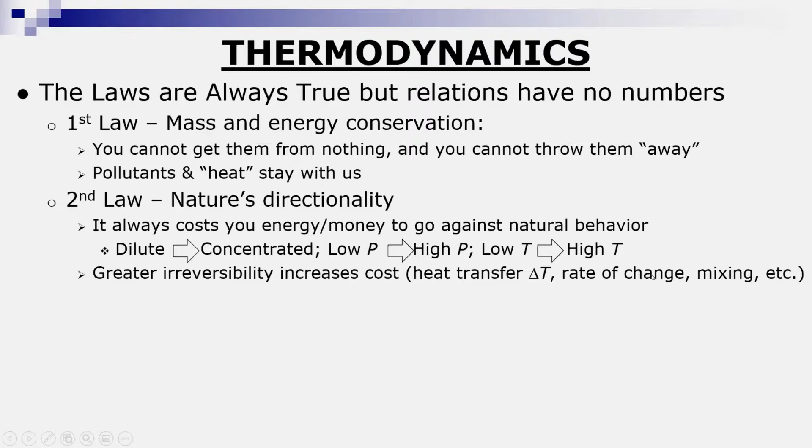So if you want to save money and effort in terms of your processing, you want to reduce the irreversibility, which means you want to reduce these kinds of differences and get toward reversible, in which delta T is zero, the rate of change is zero, mixing doesn't cost you anything, and so forth.

Now, properties give quantitative descriptions of state variables. What I mean by that is, if I specify the state, for example, temperature, pressure, composition, and phase, then I know a value. I can consider a variable to be fixed by that. And when I change the state, the variable is likely to change. And measurables are observable and usually what we specify. For example, temperature, pressure, density, the number of moles of components, and so forth.

Conceptuals are non-measurables. There isn't a meter for the enthalpy or for the entropy or the Gibbs energy or the fugacity coefficient or the activity coefficient. So you have to get those from models, and they're the ones that connect measurables to conceptuals to arrive at values.

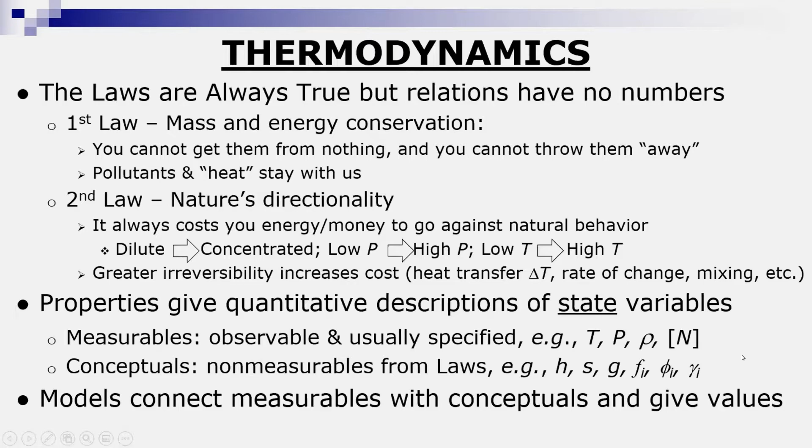Here's a picture that comes from Gani and O'Connell, this was not the first paper we actually published together, which was done in 1999, but a presentation of how to think about process models that process simulators, for example, do. They solve constraint equations and balance equations. Rafiq showed a number of those.

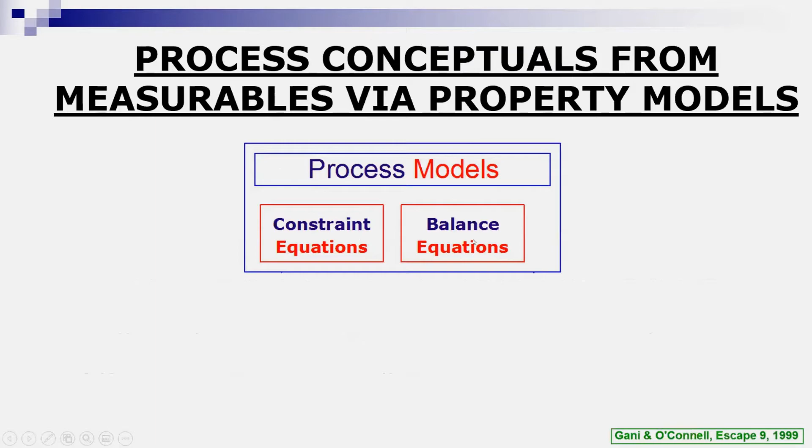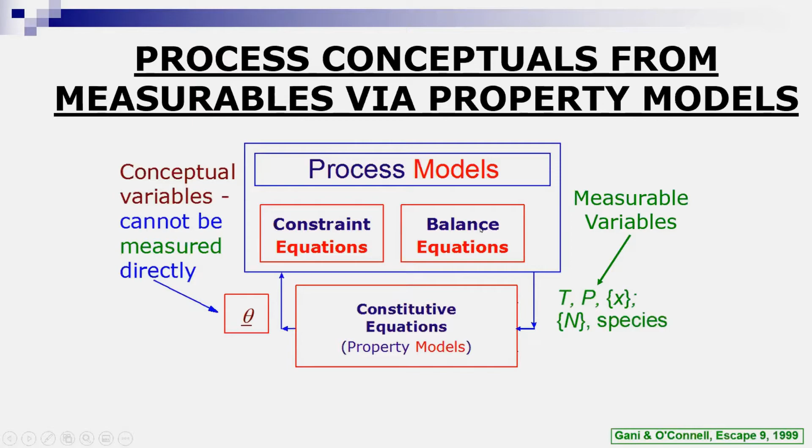You start with measurable variables, temperature, pressure, composition in mole fractions, number of moles, which species are you dealing with. And these go into constitutive equations, which is the name we would call for property models. And the result will be the conceptual variables, which you can't measure directly, but they are the ones that actually appear in the constraint equations and the balance equations. So that's why property models are necessary. And while the balance equations and the thermodynamics are always true, property models are only sometimes true.

So here's some property models. This is a picture of a process that was done by our good friend Ralf Dohrn at Bayer, again, many years ago, in which there are various units, compressor, heat exchanger, reactor, distillation column, and so forth. And he lists the properties that would be used to evaluate and determine what the unit will do, how big it will have to be, and so forth.

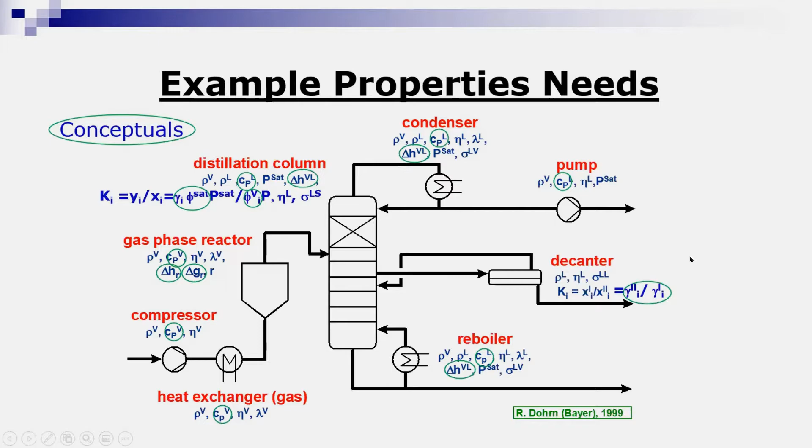And among those, there are a number of conceptuals, like the enthalpy of vaporization, the saturation fugacity coefficient, the vapor phase fugacity coefficient, Gibbs energy of reaction, heat capacities, and K factors, which would be in a decanter, a liquid-liquid system, the ratio of activity coefficients of the species in the phase. So that would be where, when you're designing a process, you have to arrive at getting property values from the models.

So what are the thermodynamic origins of what we call conceptuals? Where do they come from? Well, the open system first law defines the enthalpy of the streams. So this would be the energy associated with the stream coming in at a certain rate. And this would be the energy going out associated with various streams. And there can be more than one. And then this is plus the heat effects coming in and the power associated with work. And the sum of those terms is equal to 0.

So when you're solving the energy balance, this is where you need the models for the enthalpy difference as well as the rates of heat and work.

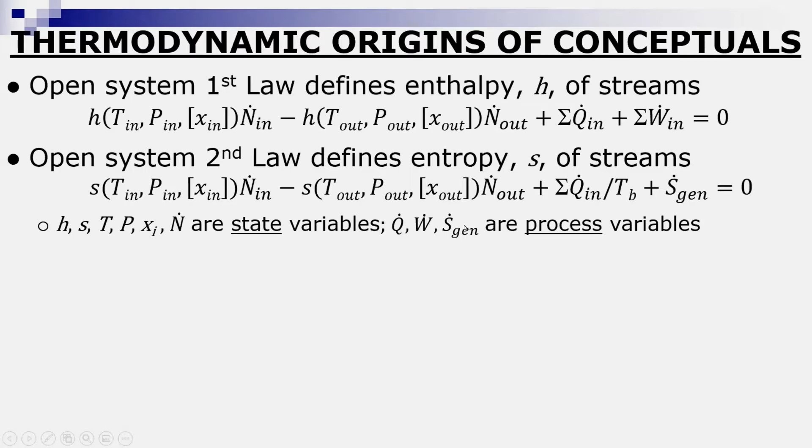The open system second law defines the entropy of the streams, and this is the same thing. The entropy coming in, the entropy going out, the heat, and in this case, to get the entropy, you divide each of the rates of heat by the temperature at which the heat crosses the boundary, plus a term we call the entropy generation. Now, the enthalpy, entropy, and so forth are state variables, whereas heat, work, and entropy generation are process variables. These will depend on what the process is doing. These will depend only on the state associated with what's going in and out.

Entropy generation measures the process irreversibilities. A reversible process has entropy generation equal to 0. And so again, as the irreversibilities go up, the value of the entropy generation goes up. Now, there's a consequence of that. It's always positive. And so if this goes up because of irreversibilities, then this is more positive. Then these terms will have to become negative and more negative.

And the consequence of that, if it's heat or changing the temperatures, it'll have an effect on what goes on in the work, for example. So this is the connection between the cost of irreversibilities and work or heat or temperature or pressure that you have in a process. Now, the Gibbs energy and chemical potential and fugacity are conceptual state variables to deal with composition effects.

So the Gibbs energy difference is the difference of H minus TS, which is also related to the difference in the chemical potential between a state and a standard state. And this defines the fugacity. So note that only differences can appear for conceptuals. So you have to have some kind of standard state in order to be able to get the value of the system you're interested in.

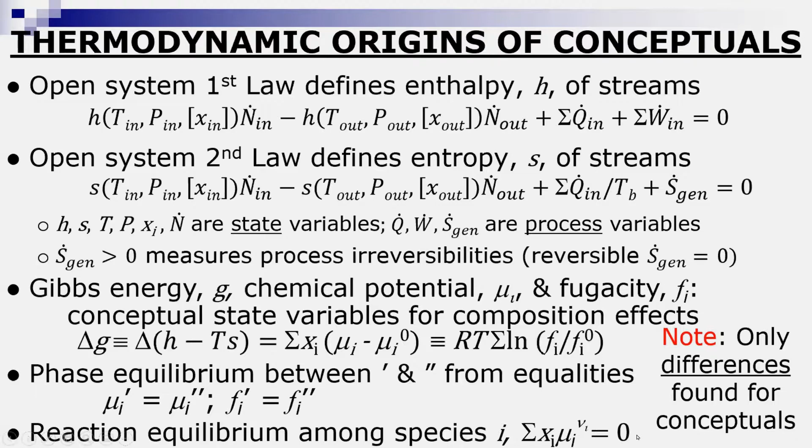So when are models needed? Well, ideality usually means no models are needed. So for example, the equation of state for an ideal gas is the compressibility factor, PV over nRT, is 1. The fugacity is equal to the mole fraction times the pressure. If you're talking about an ideal solution, which we would talk about in a liquid, then the fugacity is the mole fraction times the vapor pressure, typically.

The enthalpy difference would be simply a function of temperature, and you would integrate the heat capacity in order to get an enthalpy difference. For reaction equilibrium, the equilibrium constant is equal to the product of the mole fraction times the pressure raised to the stoichiometric coefficient, over all the species. So those are simple, and of course life is not simple. So we have to worry about non-ideality, which means models are always needed.

So where do the models come in? Well, in the compressibility factor, that would be the equation of state. In the fugacity, there's a fugacity coefficient. In the liquid phase, there's an activity coefficient. For the enthalpies, there's what would be called the residual enthalpy, which is what you put in as extra terms in the enthalpy difference. And there would be a model for that or a model for the heat capacity as a function of pressure. In reaction equilibrium, they put in the fugacity coefficient for each of the species.

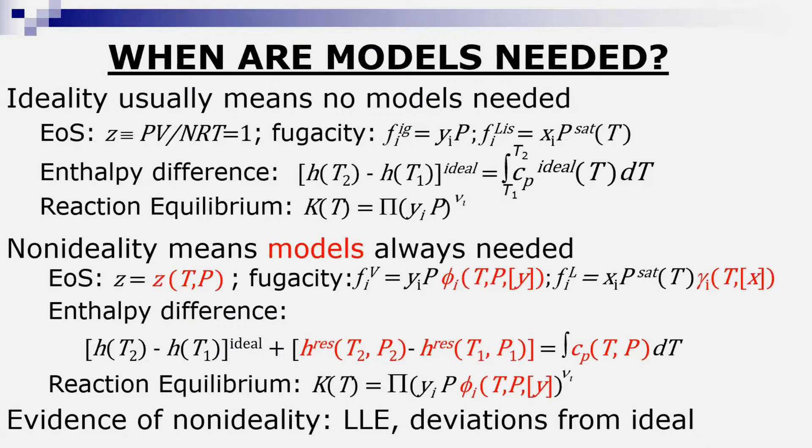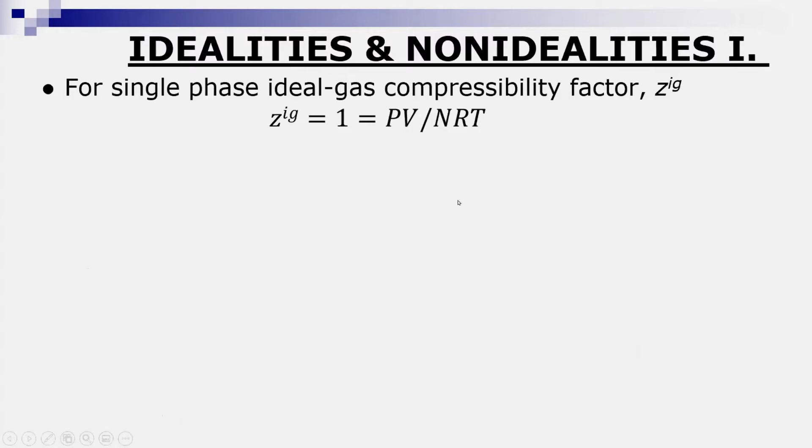So let's talk about the single phase ideal gas compressibility factor, where it would be equal to unity. There's a paper that I wrote a couple of years ago in Chemical Engineering Progress, the publication of the American Institute of Chemical Engineers, related to whether one worries about ideality or non-ideality in vapor phases. Here we plot the compressibility factor as a function of pressure for different isotherms, for two substances: propane, which is nonpolar, and methanol, which is highly polar.

This is what the graph looks like for methanol as a function of pressure for the highest temperature that we have. This is what appears on the saturation line, and this would be the low temperature. You can see that the two substances are different. For propane, the compressibility factor is less than that of methanol at high temperatures, whereas it's greater at low temperatures. These are reduced temperatures, by the way, divided by the critical.

This is the region in which the ideal gas approximation gives you within 2%, because this is 0.98. And this would be where the ideal gas approximation gets you within 5%. So if you're in this region, you may want to choose ideal gas because it's adequate for your purposes. That's where you decide how much error you can tolerate.

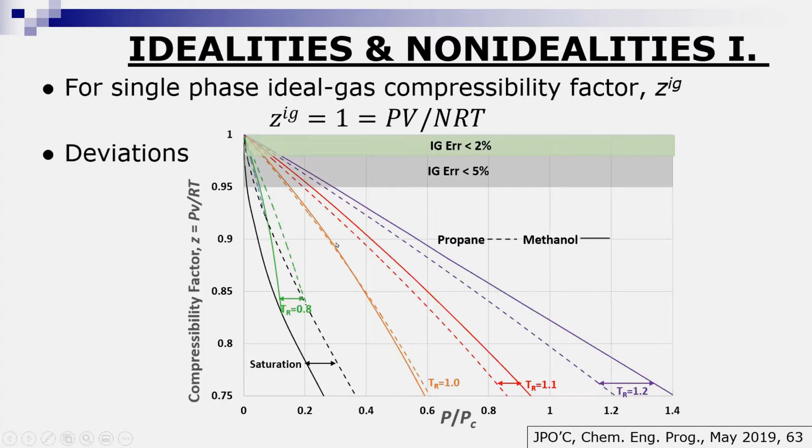Now, if we go to the first order correction, which is the virial equation of state, you add to unity a term with the second virial coefficient times the pressure divided by RT, and B, the second virial coefficient, is less than 0 over almost all the conditions that we deal with in processing. Now we see the plot of the compressibility factor as a function of reduced pressure for the same substances, the same conditions.

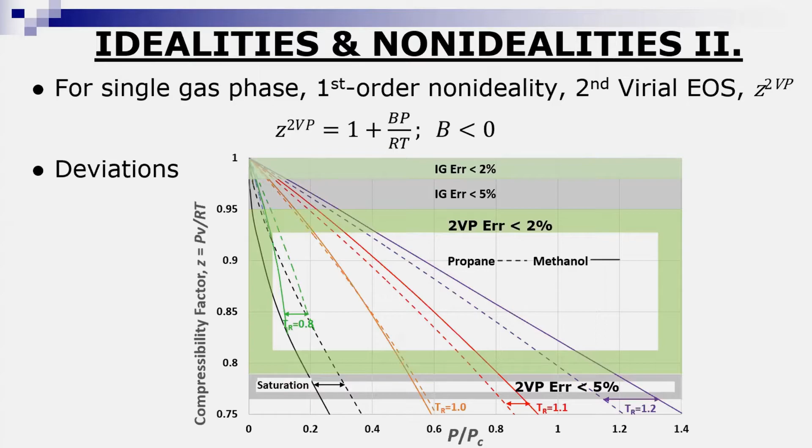So here's another case. We're now talking about what is the residual enthalpy, which is the enthalpy minus the ideal gas enthalpy. In this plot, we're plotting the residual. So the ideal gas would be such that this is 0 over all range, all the values of pressure and all values of reduced temperature. And you can see what the curve is like.

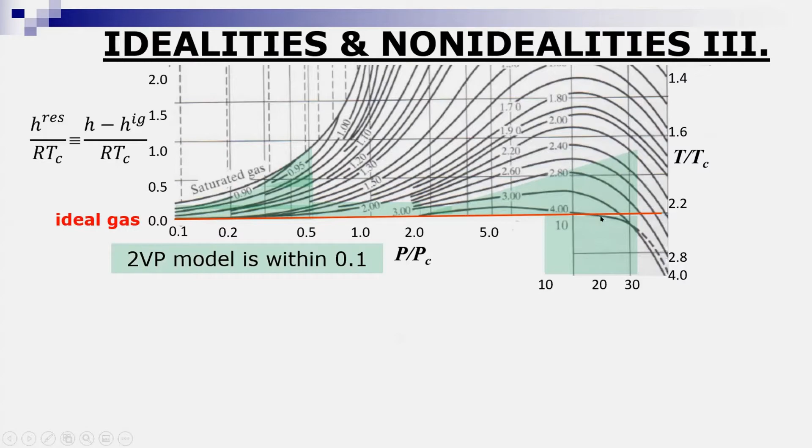And if we want to calculate the work, we can calculate it as the ideal gas term and the non-ideal gas term. And then we can see what happens. Well, on the chart, the ideal gas term is 9. And it's not on the chart, but if you calculate it, it would be 9. The residual term turns out to be 0.09, so it's about 1%. And in fact, the second virial coefficient model says its correction is only 0.04.

So this would be a case, you see, where you say, I'm not going to worry about a 1% error in how much my compressor might have to do in order to do this compression. So by evaluating the case in which you're looking at, you can consider whether ideal would work for you.

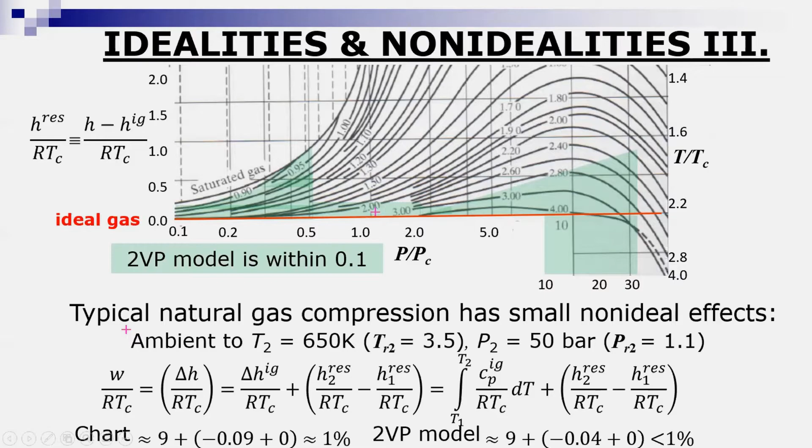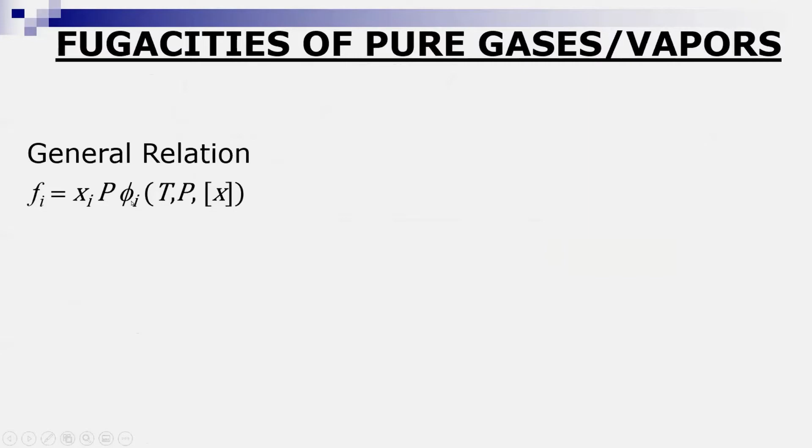Now let's go to fugacities of pure vapors and gases. The general relation for fugacity would be mole fraction times pressure times fugacity coefficient. The fugacity coefficient is not equal to 1 when molecules can see each other. In an ideal gas, molecules don't see each other. And the fugacity coefficient is less than 1 when they're attracted to each other and greater than 1 when they're repelled from each other. So what does the plot look like?

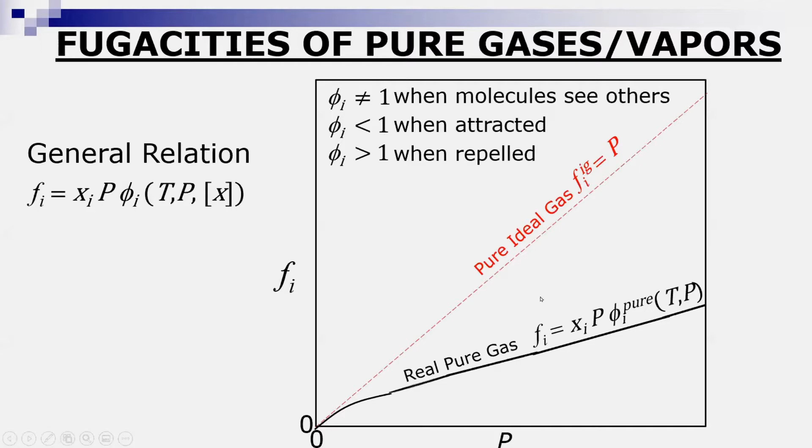Well, it's a straight line as a function of fugacity versus pressure for a pure ideal gas. And it varies this way when the fugacity coefficient is put in. I'll point out that at very low pressures, the real slope, which comes up like this, matches the ideal slope because of the rigorous Gibbs-Duhem equation, which comes from thermodynamics. And we'll talk about that a little later. The point to remember is that the slopes match when you're at low pressures.

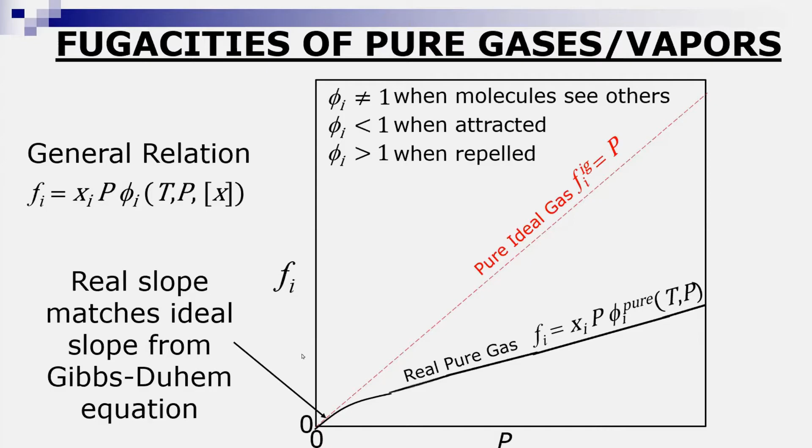So this is gases. Now let's talk about mixtures. Well, okay, here would be the case in which the mixed ideal gas would be less because the mole fraction is less than 1. And the real mixed gas would be down here. Again, it's first off reduced by the fugacity coefficient and second relative to the ideal gas. And it's reduced relative to the pure ideal gas because the mole fraction is less than 1.

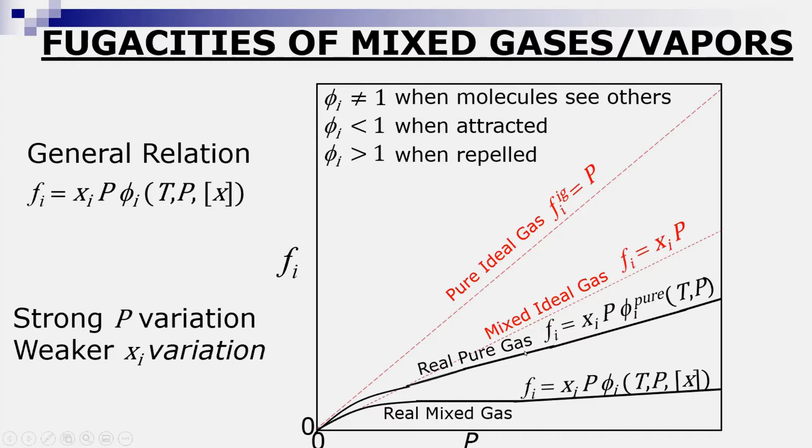Again, what we can comment is that the fugacity has a strong pressure variation for gases and a weak mole composition variation. So if you're going to be at low pressures, you don't necessarily have to worry too much about a real gas relative to ideal gas. But if you're going to go up in pressure, it makes a considerable difference.

Now let's go to liquid mixtures. There's two ways in which we can deal with this. One is mole fraction times the pure fugacity, which we'll talk about, and an activity coefficient. Or it could be mole fraction times the Henry's constant times an activity coefficient. And I use star to distinguish these, because these quantities are going to be different.

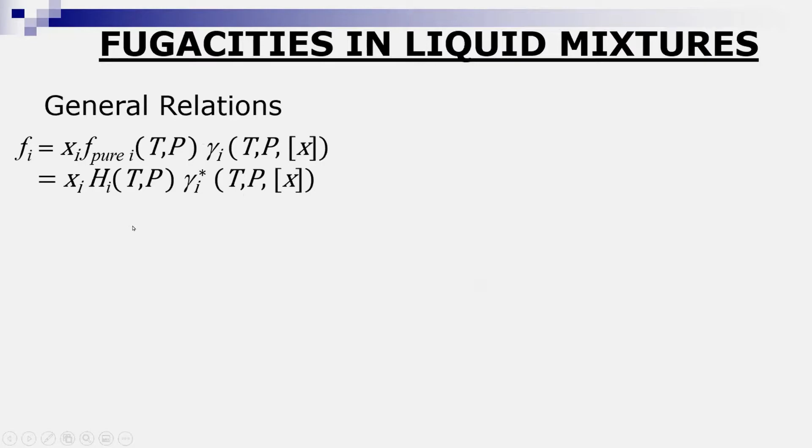So the activity coefficient is not equal to 1 when the molecules see differences between the other kind of molecules in the system and their own kind. The activity coefficient with a star on it is not equal to 1 when molecules see their own kind appearing in the mixture. So this is when the molecules are looking at other components, and this is when the molecules are looking at their own kind.

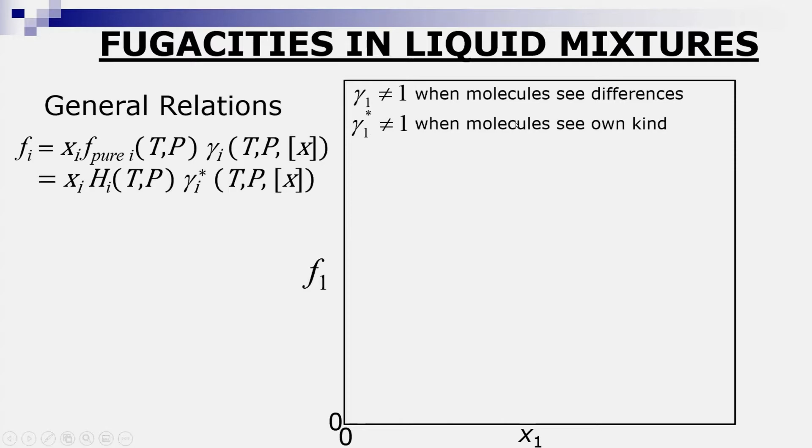So what does the plot look like? Well, here's the Henry's law ideal solution. The ideal solution fugacity is equal to mole fraction times the Henry's constant, and at mole fraction of 1, it's equal to the Henry's constant. The Lewis-Randall ideal solution is the straight line, and it's the mole fraction times f pure 1, the fugacity of pure 1.

Now the real solution is what we're after. And you can see that it goes from the Henry's law at dilute solution to the Lewis-Randall law at concentrated solution. And this means that you have a strong composition variation and a weak pressure variation, unlike gases, in the sense of how they respond to changes in the state.

Again, the real slope matches the Henry's constant ideal slope at dilute solutions, so that it deviates. And also you note that there must be some connection between the gamma with a star, which is this value, and the gamma like this, which is this value. And the answer is the gamma star over gamma is f pure 1 over H1, which is not a function of composition.

Now, Rafiq actually showed that to you, and hopefully this reinforces the idea that you can choose whichever way you'd like to do it. You can worry about an activity coefficient, or you can worry about Henry's constant. And it really depends upon whether you're dealing with dilute solutions or concentrated solutions.

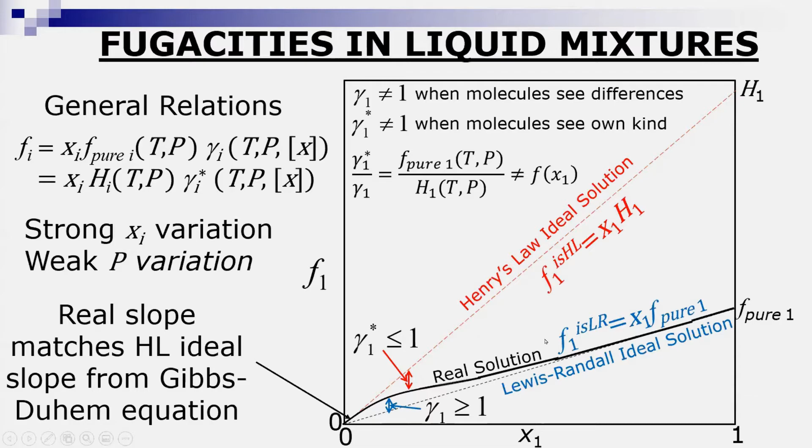So what are some of the expressions for fugacities? Well, you use a fugacity coefficient as we've shown, and the second virial coefficient term would look like this, where the second virial coefficient is between two different molecules, and there are correlations for this.

For cubic or higher equation of state, the fugacity coefficient is complicated. And as I think Rafiq implied, you don't always need to do it, and you get into trouble if you want to do complicated calculations. So one of the things you want to do is evaluate whether you really need to go to a higher order equation of state. Traditionally, we use activity coefficients for liquids, and the activity coefficient and the pure component fugacity.

Now, fugacity normally would be calculated as the vapor pressure times the fugacity coefficient of the saturated vapor. And for an ideal solution, gamma is 1. And also the fugacity coefficient of the saturated vapor is the same equation that you evaluate the fugacity coefficient in the vapor phase, but you evaluate it at the state of the vapor pressure and pure component.

And you have to do that because you want consistency when you're doing your vapor-liquid equilibrium. And you can only get consistency with this particular formulation for the saturation fugacity coefficient and the vapor fugacity coefficient. Now, as Rafiq was pointing out, you can use the equation of state in order to get a fugacity coefficient in the liquid. It takes more computation time, and reliability can be uncertain.

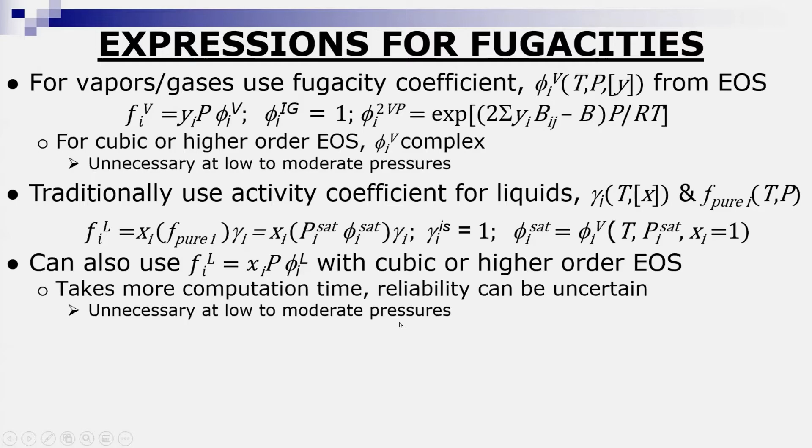It's better to use it combined with the activity coefficient model than use it with a Kij, which then modifies the parameters, because generally in vapor-liquid equilibrium, you have activity coefficient models ahead of where you have data and tabulations of binary constants for equations of state. Again, it's perhaps unnecessary at low to moderate pressures.

Now, if you're doing VLE, equal fugacities means you set two variables and solve for the others. This is basically what Rafiq has also shown, and they're much more complicated when you actually put in all of the variables that appear in the equations of state and so forth. And the article that we did in 2006 describes how to count all the variables in there, as well as gives prescriptions for how you go about solving them.

At lower pressures, it turns out that the ratio of the fugacity coefficients is about 1. So in this case, you focus on how to get the activity coefficient, because that's going to be the determining factor in what will settle the phase equilibrium.

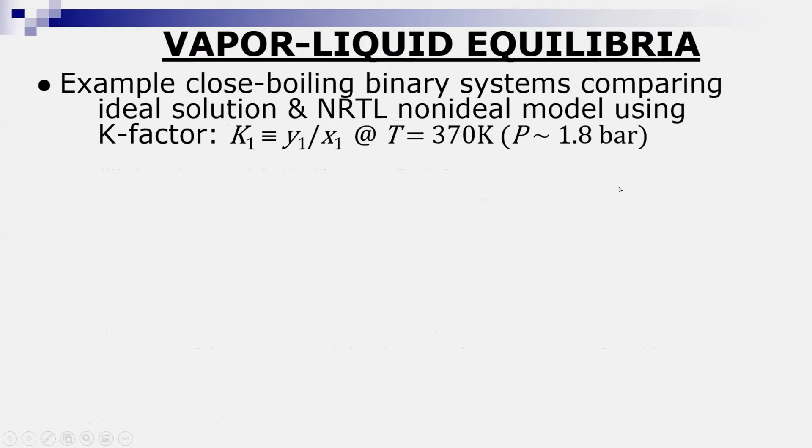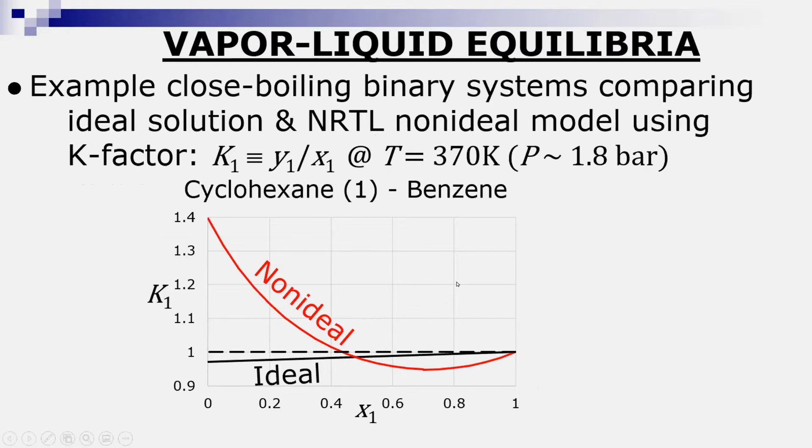Okay, let's look at another case. Here's cyclohexane and benzene. Here's the unity, which would azeotrope. The ideal goes this way in a straight line. The non-ideal goes like this. Now, this says that cyclohexane and benzene actually form an azeotrope if you believe the non-ideal model. So is the model right? Is there really an azeotrope? And the answer is yes. You look in the literature and there it is. And you say, but wait a minute, these are non-polar substances. There shouldn't be a problem with these differences in them.

Well, let's talk about criteria for azeotropes, because we'd like to know as much ahead of time as possible about whether we're going to get an azeotrope or not. So simple distillation cannot purify azeotropic components. So how do you detect? Well, I suggest looking at the relative volatility, and I'm sure Rafiq talked about the relative volatility as a quantity. It's defined as the ratio, between two components, of vapor to liquid mole fraction of component 1 to component 2. Now, if we put in what these are from our fugacity relations, we wind up with 3 different ratios. One is a ratio of the activity coefficients, another is a ratio of the vapor pressures, and a third is a ratio associated with vapor phase non-ideality.

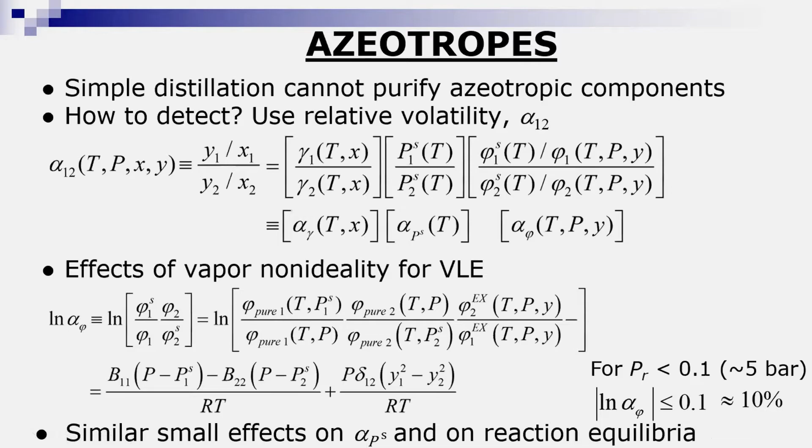Let's look at these as we go along, one term at a time. If we look at the effects of vapor non-ideality, what we'd like to find out is, when does this deviate from unity? And it turns out that the second virial coefficient term will give you the first order variation of that. And if you're talking about up to 5 bar, it turns out that it's only a few percent in the relative volatility, which often can be ignored, particularly when we're asking ourselves the question, will a system form an azeotrope or not? And I can point out that if you do the analysis for the vapor pressure ratio, you get a similar small effect of vapor non-ideality in these systems. And also in liquid phase reaction equilibria, you don't get much non-ideality. So the relative volatility is basically a composition effect.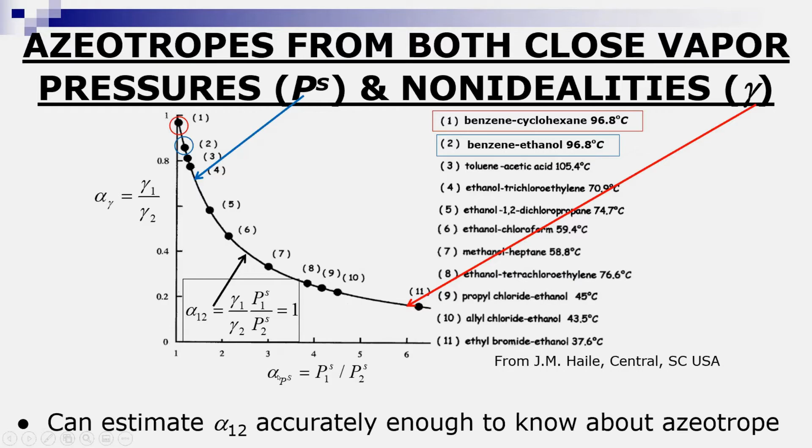So typically you can think this is all there is, but on the other hand, you can run into cases in which some of these are at high or low activity coefficient ratios where these are less than 1. But if you are able to estimate the activity coefficients, then you can actually arrive at a description. So let's talk about estimating alpha 1, 2 accurately enough to know about an azeotrope. So here's our alpha. These two we don't worry about.

This is the alpha gamma. And the range of alpha from mole fraction 0 to 1 is going to be this quantity when it's 0, and it includes the activity coefficient at infinite dilution times the ratio of the vapor pressures at the boiling temperature of component 2, all the way to the case in which it's now pure component 1. So it's this, and you have the activity coefficient at infinite dilution of component 2 and its vapor pressure at the boiling temperature of component 1.

Okay, so an azeotrope if alpha is 1 between these two limits. So you need only the infinite dilution properties to determine whether you've got an azeotrope. And you can see on this plot, this is alpha 1,2 as a function of composition in some binary systems. And you can see that here's the azeotrope line. And these are actually drawn in from data, but you only need to know about the limits in order to decide whether it's going to be an azeotrope.

So this one, for example, it's always on the side greater than 1, so it's not an azeotrope. This one goes from one side to the other. This one is always on the other side, with alpha less than 1. And we're not sure about this one. So in fact, you'd want to either make some measurements or go to some reliable data in order to find out if you actually got an azeotrope.

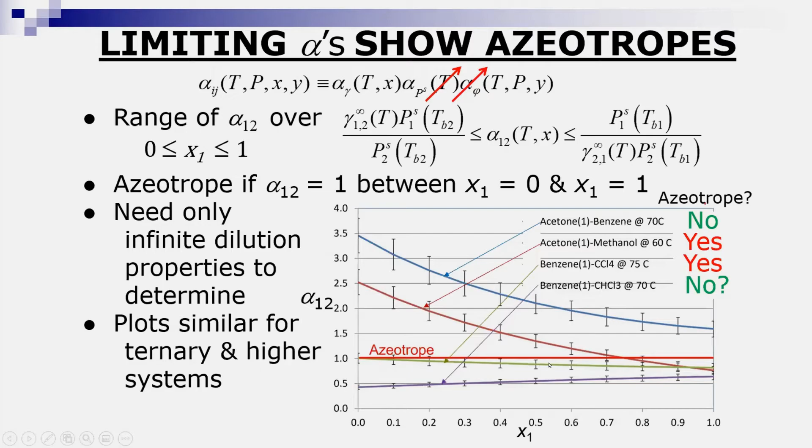Determining an azeotrope experimentally can be very hard, because you go into the laboratory, you put the mixture in, and you boil it away until you find out if you got an azeotrope or not. And these plots are similar for ternary and higher order systems, so you can find out ahead of time whether you've got an azeotrope or not.

Now, changing subjects, thermodynamics provides consistency among properties. What you get are the property derivatives, which are always true mathematically, and there are famous ones which have some names. For example, the Gibbs-Duhem equation, which relates the partial molar properties to each other. This is the generalized Gibbs-Duhem equation, where F can be volume, enthalpy, Gibbs energy, whatever. And the partial molar property would be the partial molar volume, the partial molar enthalpy, chemical potential, log of the fugacity coefficient. So any of these can be put into this equation.

And you say, where did this come from? What's going on here? And the answer is, if you have a system with a certain number of components, if you look at this equation, the number of variables that are in it is the total number of components plus 2. There's one of these for each of the components, and then there's temperature and pressure. Well, the phase rule says you can only have C plus 1. So there has to be a relationship amongst these variables, and that relationship is the Gibbs-Duhem equation.

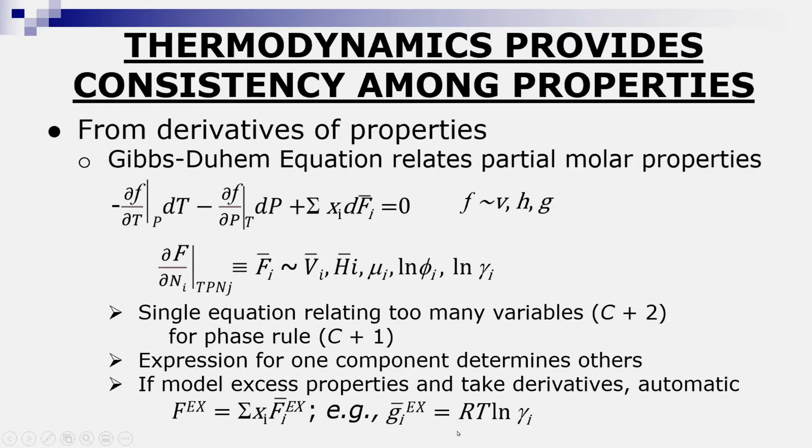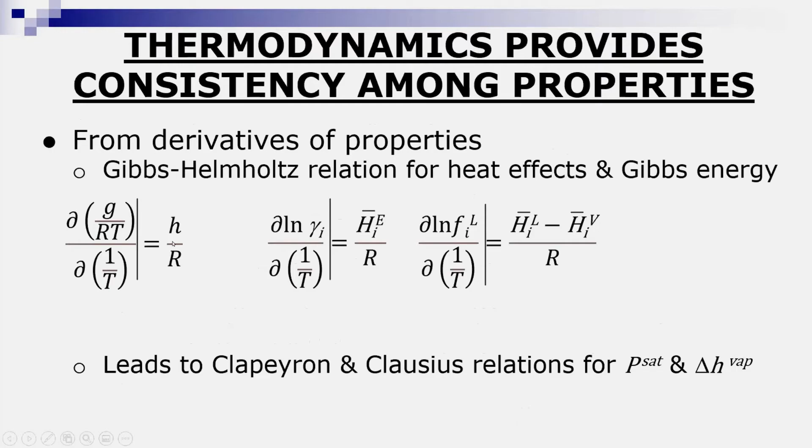Another equation is known as the Gibbs-Helmholtz relation for heat effects in the Gibbs energy. This is the generalized Gibbs-Helmholtz relation. It's a derivative, G over RT, taken with respect to 1 over T, at constant pressure and mole fraction. This then is applied to, say, activity coefficients and leads to activity coefficient temperature dependence of the partial molar enthalpy. If you're talking about the fugacity in a liquid, this turns out to be related to the heat of solution. And I encourage you to look at the article by Mathias in I&EC Research, where he explores all of the consequences of the Gibbs-Helmholtz relation, and in particular, the problems that people have run into converting data or matching data for solubilities and the heats of solution.

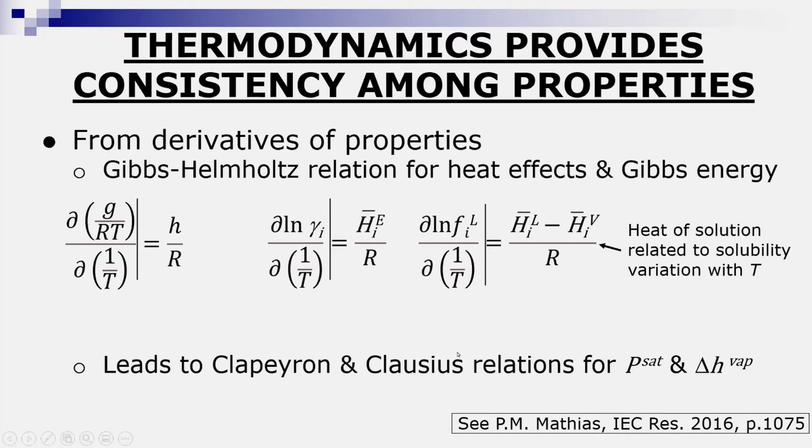The relation leads to the Clapeyron and Clausius relations for vapor pressure and enthalpy of vaporization. So here's the relationship that would come out from the Gibbs-Helmholtz function, and this would be the Clapeyron equation, which is the difference between the enthalpy in the vapor and the liquid, or the enthalpy of vaporization, divided by the difference in the compressibility factor in the vapor and the liquid. And if you assume that the vapor is an ideal gas and the compressibility factor of the liquid is 0, you get the Clausius-Clapeyron equation.

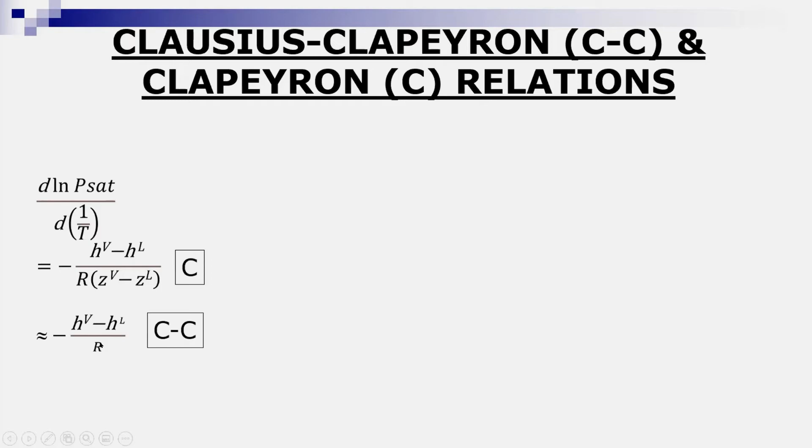So there's an assumption in there. And the question is, is this a good assumption? Well, let's look at the data. This is now a plot of the enthalpy of vaporization, and I'm going to put in both the Clapeyron equation and the Clausius-Clapeyron equation. And there are several components in here. We've got nitrogen, propane, octane, and methanol. And we've identified the normal boiling point as this pressure.

This is a function of temperature. I can't actually see that, but it should be. Anyhow, here's the normal boiling temperature. And if you talk about the rigorous equation, this is how it varies up to the critical temperature. And this would be the Clapeyron equation. This is the Clausius-Clapeyron equation. And this is what you would get if you chose the value right at the normal boiling point. And this is true for each of the components.

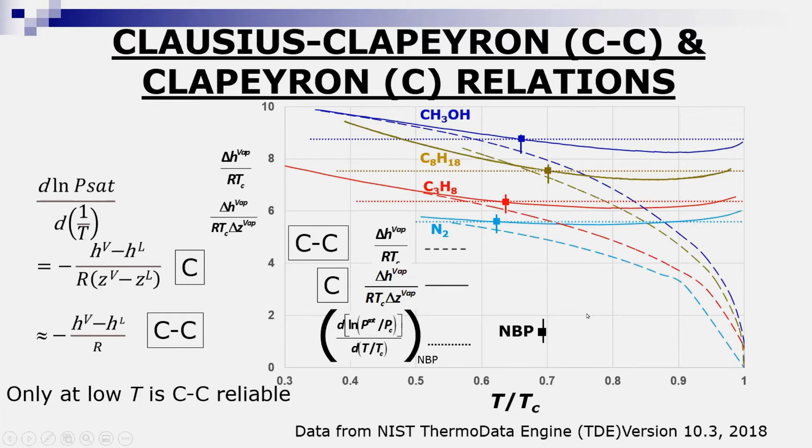And if you look at it, you can see that even if you get the value at the normal boiling point and use the Clausius-Clapeyron equation, you're not going to get the right value because there's a separation between the value of the rigorous equation and the approximate equation, which occurs all the way along. Only at low temperature, and this is really low temperature, below the normal boiling point, is the Clausius-Clapeyron equation going to be rigorous. So you have to be careful about going from one set of properties to the other. But the Gibbs-Helmholtz equation tells us exactly how to do this.

So now let's talk about solubility. If we're talking about a gas in a liquid, that is, the critical temperature of the component we identify as 1 is less than the temperature of the system, but the temperature is less than the boiling temperature of component two. That's what we mean by a gas in a liquid. And the fugacity relationship would be like this, because normally the solubility of a gas is limited, so we use the Henry's law expression.

If you're talking about a solid in a liquid, then you have a choice. You can either do Henry's constant. Now, this is where the temperature is less than the boiling temperature of component two and less than the melting temperature of component one. And so the solid fugacity will be described like this. The liquid, you can have your choice. You can either use a Henry's law or use the solvent. And in one case, you have to have the value of the fugacity of pure liquid to pure solid. And the other, you have to have a Henry's constant. So these would be where the modeling will have to come in.

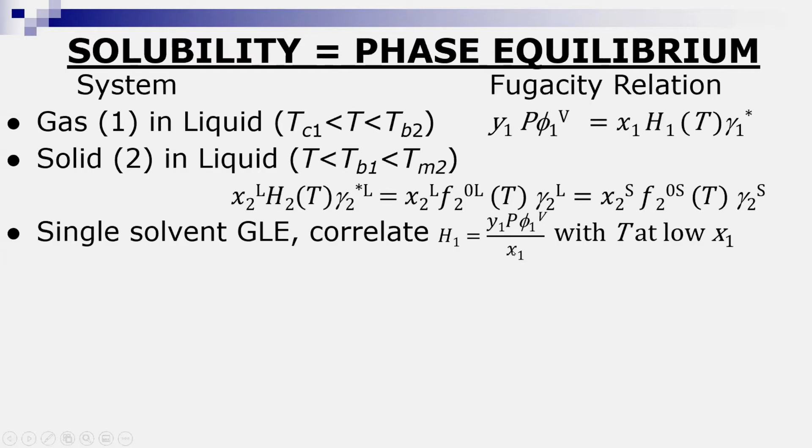If you're talking about a single solvent gas-liquid equilibrium, one of the things you can do is, if you get data, you can get the Henry's constant from the ratio of fugacity in the vapor phase divided by the liquid mole fraction. And you do that at low mole fractions. If you're talking about a single solvent solid-liquid equilibrium, you correlate either the ratio of this quantity to the Henry's constant or this quantity to this constant. This was the form in which I saw an equation in Rafiq's presentation related to the melting temperature and the enthalpy of melting.

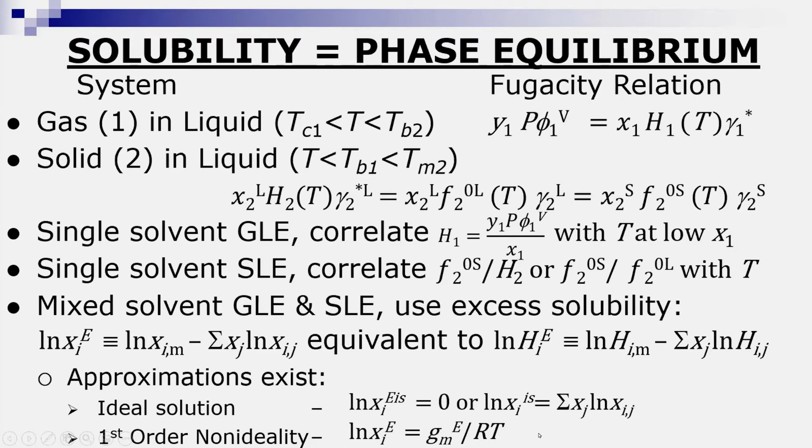If you're talking about mixed solvents, however, and often we have to do this, my suggestion is that you use excess solubility, which is defined as the solubility of the component in a mixture minus the summation of the mole fraction times the solubility in each of the solvents. That's equivalent to choosing an excess Henry's constant, which is the Henry's constant in the mixture minus the sum over the individual solvents. And there are approximations which exist. For example, the ideal solution approximation is that these quantities are equal to zero. The first order non-ideality is such that the excess is equal to the excess Gibbs energy of the solvent mixture divided by RT. So let's see what these look like.

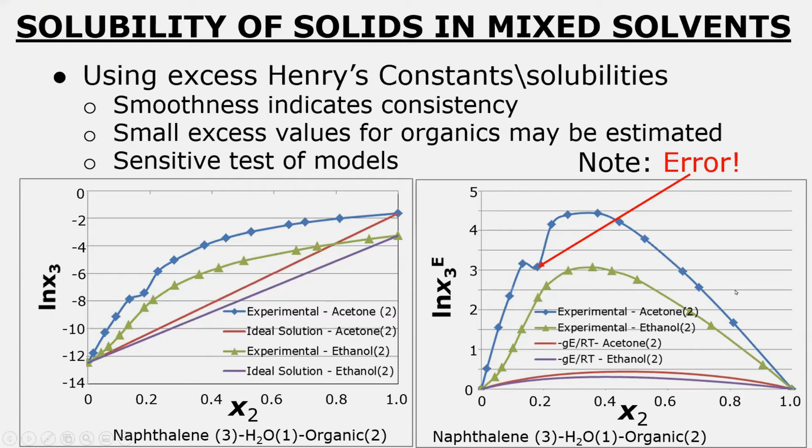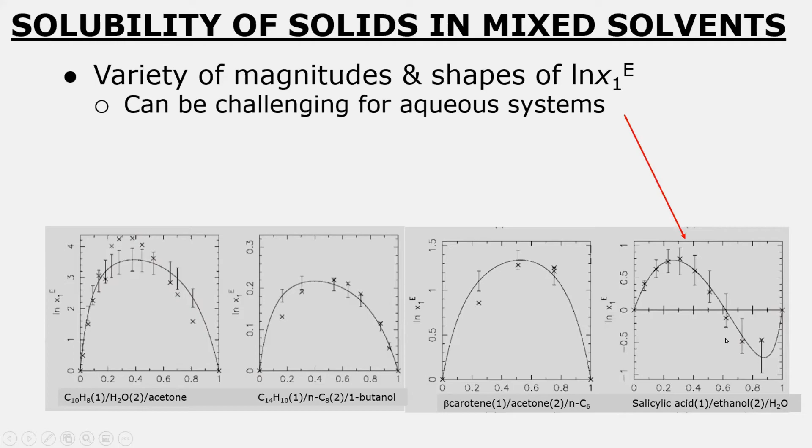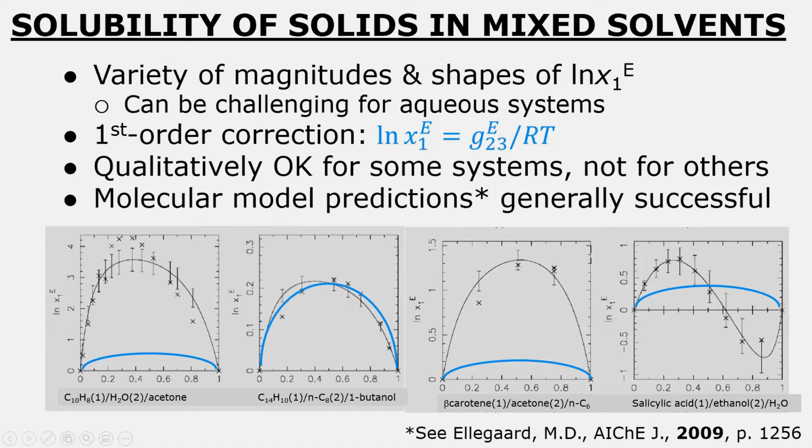So what are the lines on the graphs? Well, these came from work by Martin Ellegaard and published in 2009. We worked with Jens Abildskov at DTU. And you can see that these are generally successful. So it's worthwhile thinking about if you want to predict solubilities, these are solids, from the models that are developed by Ellegaard.

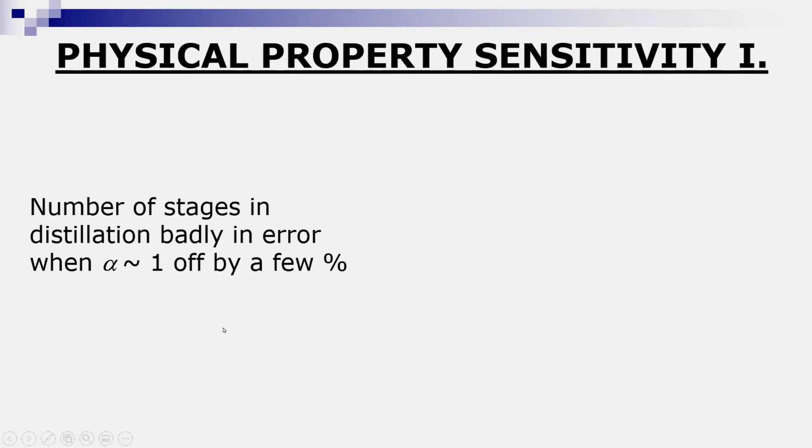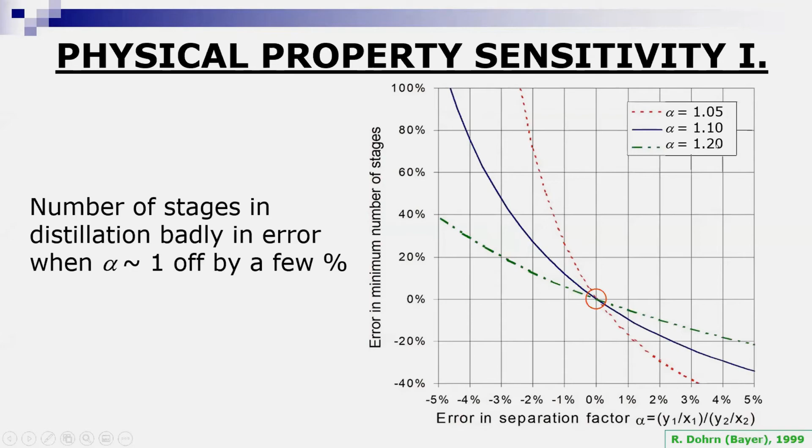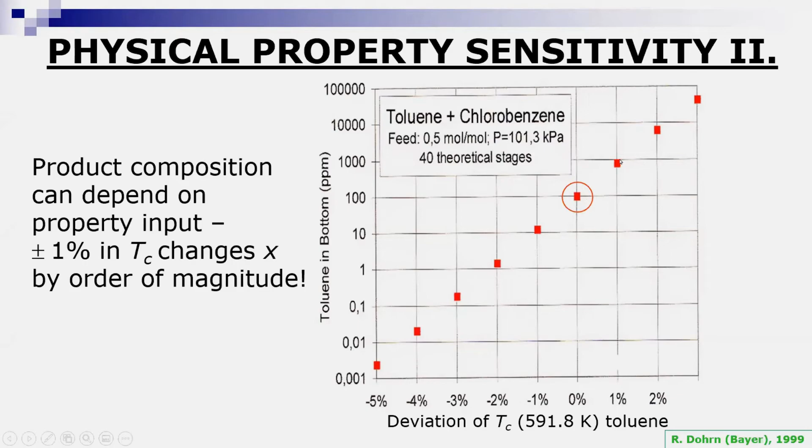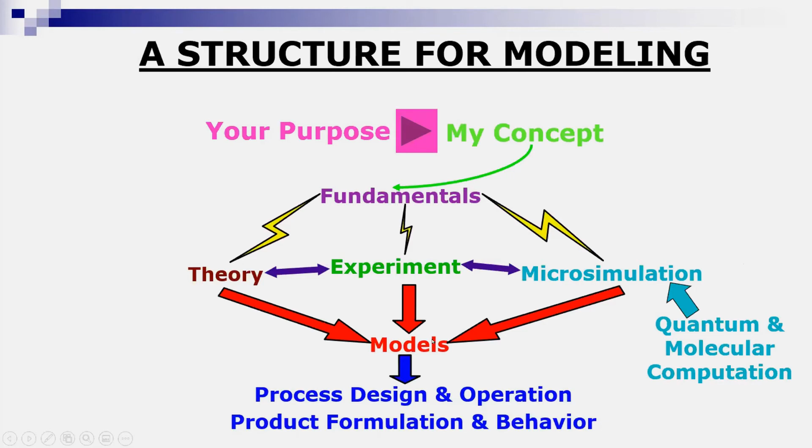So let's talk about a view that I have on a structure of modeling. What you're interested in is getting process design or product formulation and behavior. My concept of this would be to start with the fundamentals and then examine how this would be analyzed by a combination of theory, experiment, and what I call microsimulation, which would be quantum and molecular computation. And then those lead to models. And you look at what would each contribute.

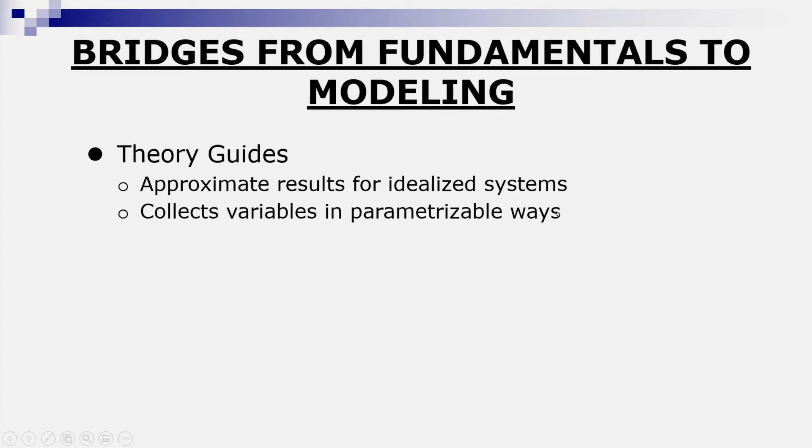Well, theory gives you approximate results for idealized systems, but it does collect the variables in ways in which you can parameterize them. And so the model formulation often comes from theory. There's theory, for example, in local composition models, as Rafik was pointing out. There's a theory associated with group contributions, and it collects those variables and descriptions and parameters in ways in which you can parameterize them and get numbers.

Microsimulation augments this, and it's essentially exact molecular physics and chemistry, but it uses approximate microinteractions and electronics. So it isn't completely reliable, but on the other hand, it can give you a verification of whether what you're looking at is proper. Experiment is essential. It's our only direct measure of nature's behavior. The problem is it only leads to empirical correlations, not models in the sense. So what you need to do is to bring them all together. And that's what people have done with the models like Rafik was talking about.

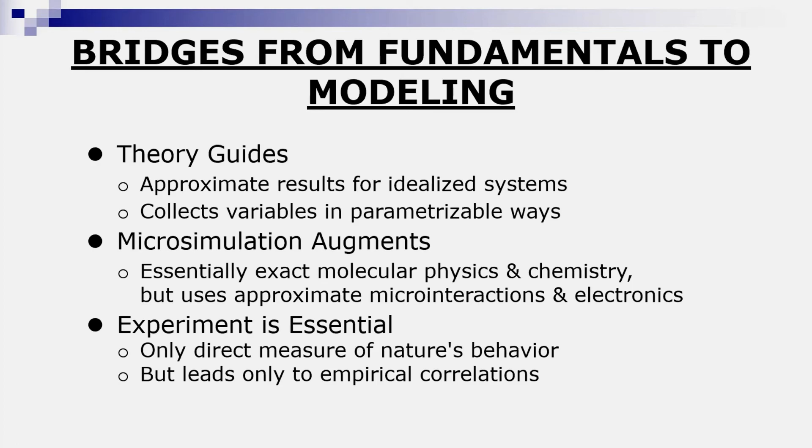So what are the ways in which I encourage you to do model formulation? Well, for one thing, remember what you're trying to get. If there are data and parameters in the literature, check them. You might run into one of those 30% papers. So the numbers and the parameters are not always reliably communicated. But you can usually analyze whether you're getting something that's reliable or not. If the model has been established, but there aren't any parameters, you should take enough data to get values, unless you believe in estimation methods like group contributions and so forth.

If the model form is okay, but you're not sure how reliably it is going to work in your case, you should explore what the results are at different limits that you're going to get, and see if the consequences at these extremes make sense and are consistent with what behavior would have to be in your process. If the current models are inadequate, then you're going to have to take enough data to test your model ideas.

If the model form is even unknown, then the interactions are undetermined. Then what you have to do is find the phenomena that are most important to the situation. You do molecular measurements like spectra and calorimetry, for example, and you can do microsimulations to reveal structural effects. And if the behavior that you have would really make a difference in what the consequences are, take the simplest data first. For example, get a boiling temperature.